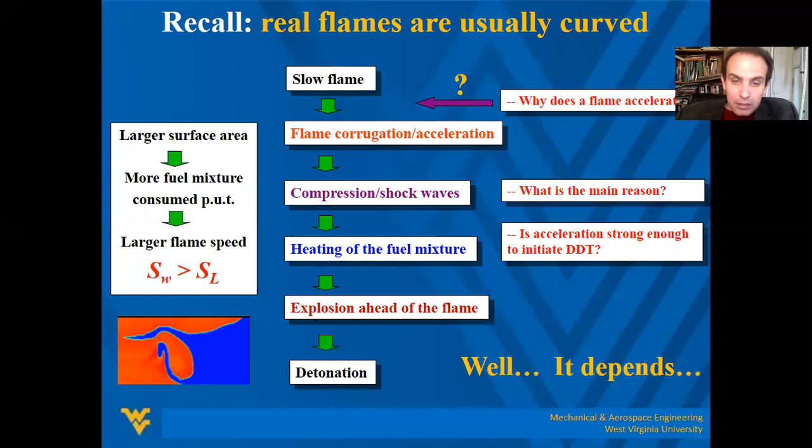But remember, we arrived at the point of how flame gets corrugated. And here you should realize two things. For decades, for most of the time, people assumed that flames are usually turbulent, and that flame is corrugated due to turbulence. That was a very difficult point because people say, okay, so flame is corrugated because of turbulence. Then I can say, okay, so to know how the flame corrugates, to know how the flame propagates, I should know turbulence, right?

If a mouse is scared of a cat, he or she should investigate what the cat is, right? Otherwise there's no way to survive. So we should investigate turbulence. And since we did not know what turbulence is, we did not know how flame propagates.

But here, luckily, the situation is not so difficult. There are many situations, and we will consider several of these in our class in April, in the lecture that's left. Very often turbulence is not so crucially important. It can be weak, it can be supplementary. And then we are lucky, then we are able to solve the problem.

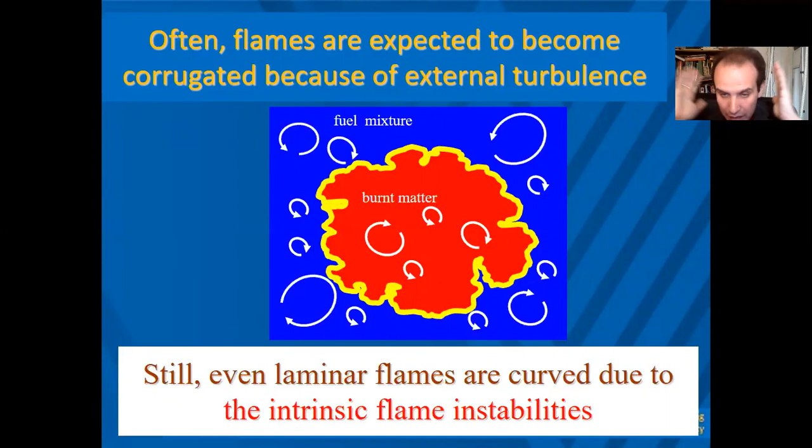Remember, in fact, even laminar flames are corrugated, and they can be corrugated due to combustion instability. So remember this picture, and I showed you also a picture of a flame front in the previous lecture which is corrugated but laminar. So even a laminar flame may be corrugated. Here there is no turbulence, that's vorticity. But in reality, even here, when I have a laminar flame, I provide vorticity. So turbulence may exist.

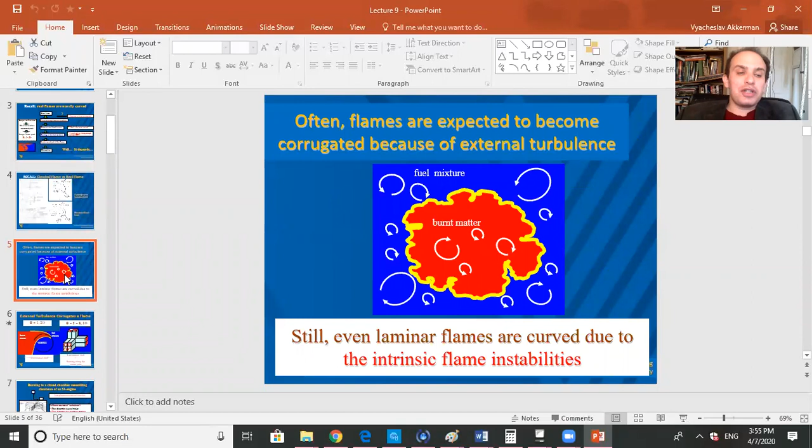So let's discuss what turbulence is and what we can deal with regarding turbulence. To answer this question, I should say that there are several approaches to how you can consider turbulence and what you can investigate. So let me start with this.

I make a pause for a minute so everyone wakes up and is ready to listen.

Okay, so in fact, I will tell you something. Remember I told you what is our key parameter for flame propagation? It's thermal expansion, theta, right? It's the density drop at the front. Here it is. And typically it's quite large.

But if you take my turbulence class, you may remember that basic turbulence theory says that density is constant. So basic turbulence theory is not ready to consider reacting flows. Basic turbulence theory assumes that the density of fuel and burnt matter are the same, so density is constant - you talk about an incompressible substance. And I should tell you that for a long time, all theories of flame propagation - theories, not simulations, not experiments, but theoretical approaches - were limited to the case when theta is equal to 1.

That is, when the fuel and burnt matter have the same density. Moreover, most theories employed two-dimensional geometry. You may say it's ridiculous, it's stupid. Well, people had nothing better, and they still were able to provide something to describe flame propagation. So let me follow this.

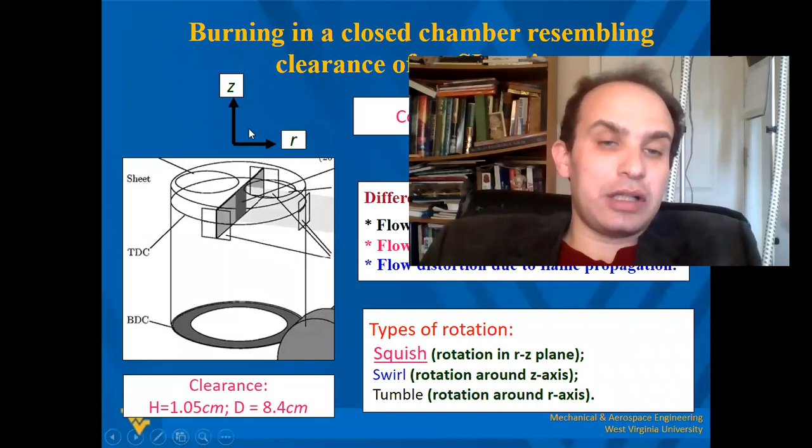Assume I have a flow and I have a vortex which rotates. If I rotate it, like on the next screen - what does rotation mean? Rotation provides you centrifugal acceleration. Do you remember centrifugal force, centrifugal acceleration? Imagine you have a circus and there is a biker who drives very fast. This biker can go along the wall. Why? Because there is a centrifugal force which protects him or her from falling down.

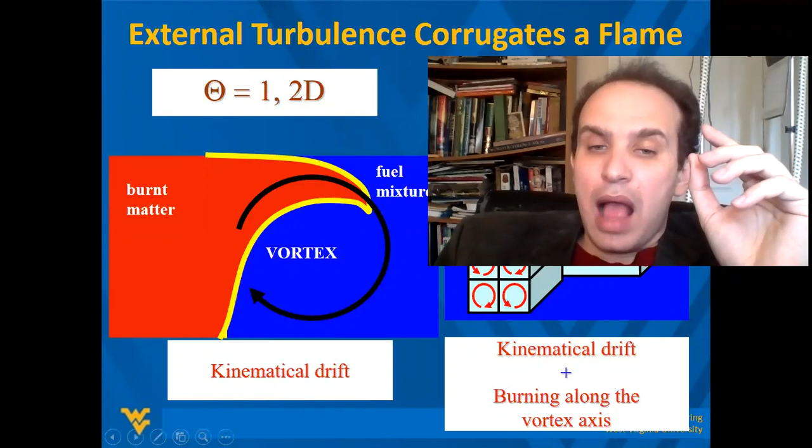The same story here - instead of a biker, now I have a flow. Imagine I rotate it, I have flame propagation along the vortex axis. So what does my vortex do? My vortex pushes heavy fuel outward and light burnt matter inward. So it will cause extra flame elongation, and this effect is very important - it's really related to thermal expansion. Since this effect is really related to thermal expansion, it's extremely important.

Because what do you see on the left-hand side? On the left-hand side, I tell you the classical approach - then theta is equal to 1, in a two-dimensional picture, when people accounted for kinematic drift.

Now we know two things: that in fact, kinematic drift - I will show it later - is weaker than expected because of thermal expansion. And you have a dynamic effect - burning along the vortex axis, which is a dynamical drift, centrifugal force. And this may very often dominate over kinematic drift. I will repeat it when it comes to formulas, but please remember this - that's conceptual.

So what do we know about turbulence when we consider some applications? Let's say I consider a classical engine, a car engine, as an example. There are many devices we can talk about - bottom dead center, top dead center, and piston motion. So what does turbulence do here, and what should I know?

First, you should know that in combustion we deal with complicated chemical kinetics, so I should know how turbulence interacts with chemical kinetics. Second, what are the sources of turbulence if we talk about an engine - but it's the same in turbines or whatever. First of all, it's injection, intake. So when I put fuel, I inject fuel in my burner, I generate turbulence.

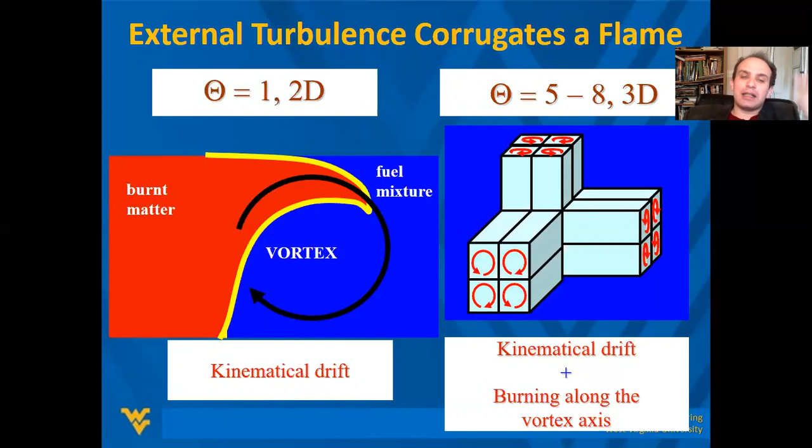Okay, so what I want to say - very good point, please go ahead. So the flame propagates due to vortices in all directions besides stretching, right? Yes, exactly, so it is, okay. Exactly, besides stretching, that's a very good point - besides kinematical drift, which you call stretching. That's a very good point. Yes, so flame propagates, besides stretching, flame propagates in all other directions.

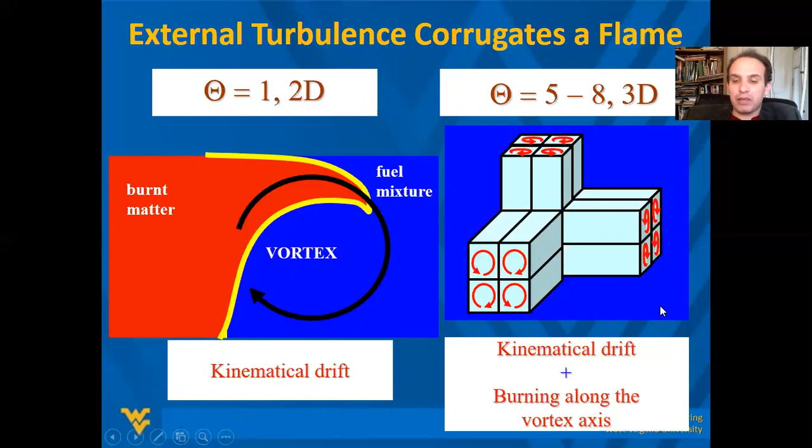Or let's say flame propagates in one direction, but there are vortices in all directions. But if I'm on the left-hand side, I would not feel my flame interacting with anything except stretching. Because there would be no difference between fuel and burnt matter - fluid mechanics knows only density. As long as I'm on the left-hand side, the density of burnt matter and fuel mixture is the same, so any rotations would not provide any centrifugal force. But what we see here is that there is centrifugal force, and it may dominate.

That's a very good point, and we will talk about this in terms of formulas. Very good point. Now...

So what we'll do next is really important and a really nice picture, so please pay attention to this. We'll be talking about the so-called regime diagram. Sometimes people call it the Borghi diagram, sometimes people call it the Peters diagram. There are different ways this diagram is presented in the literature, but it's something really important.

So far I told you that there are different types of turbulence, how it behaves depending on geometry of the source and so on. Now I would tell you that there are different regimes of flame propagation - it means turbulence may influence flame in different ways. Here I would like to show you how it happens, how flame propagates and how these regimes work, what they are, and how flame interacts with turbulence.

So please, this slide, next slide - okay, this slide, next slide, and a little bit, and this slide - that's what we have. This is something, guys, that I want you to remember. Please pay attention. So what are we talking about?

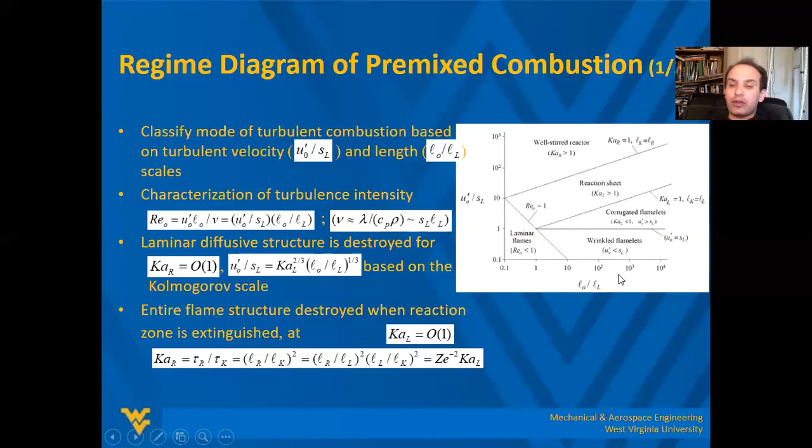Here's the same diagram, and here's this picture, and this is how it looks. You may realize if your integral scale is less than the flame scale, and if your U prime root mean square velocity is less than flame velocity, then we may say that flame is laminar. There will be no turbulence here. Your turbulent Reynolds number is less than 1.

You know that Reynolds number is characteristic of turbulence, right? It should be really big to have turbulence, so there is no turbulence here, but turbulence there is otherwise. Please look at these diagrams, and here we will try to understand together what's going on, where we are, and how things go. Please try to understand it.

So what happens here? This axis is L0 over LL, the ratio of the integral scale and flame. If I proceed in this direction, it means my vortices get larger and larger as compared to flame front, compared to flame thickness. If I proceed here, my turbulence becomes more and more intense as compared to flame propagation. Let's see what happens.

So what we have here, if you see my pointer, you may see here is a wrinkled flame regime. Again, all these lines are by order of magnitude, so it does not mean that here something happens, but if I increase velocity 10%, something else happens. It's a characteristic difference between the regimes.

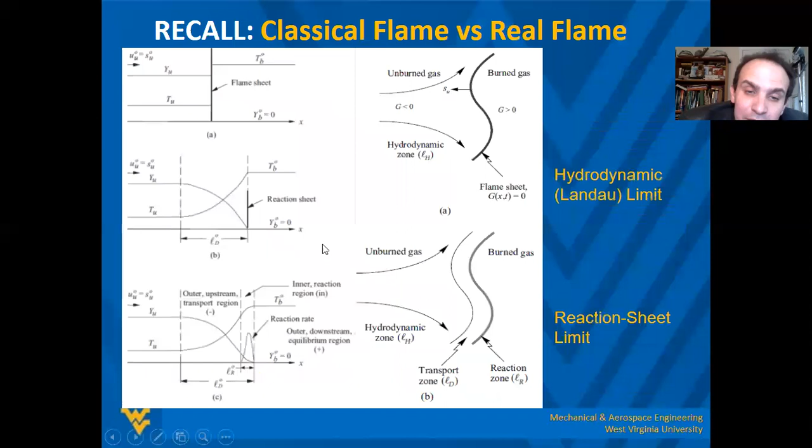So if I look at this picture now, what happens? Still, even the smallest vortex here is larger than the reaction zone. So it means turbulence does not penetrate chemistry here. Chemistry itself, turbulence itself - you don't need to know chemistry to describe turbulence, you just describe turbulence coupling to internal flame structure. That's what we call the reaction sheet regime.

It goes between two inclined lines. One line corresponds to when Kolmogorov scale equals flame thickness, when vortices just start penetrating it. And the second line is when Kolmogorov scale equals the active reaction zone thickness. So this is a regime when vortices penetrate thermal flame thickness but don't penetrate the reaction zone.

So if I want to describe this flame in picture C, what should I know? It will be more complex than corrugated flames because I have two features here: flame interaction with turbulence on small scale, so flame modification based on turbulence, and flame corrugation on large scale like before. Does it make sense?

Now let me go counterclockwise more. What happens if turbulence becomes very, very strong? At some point my small vortices will penetrate the active reaction zone, and that's when turbulence coupling to chemistry will happen. In that case I will not have a flame itself anymore because the front will be corrupted and destroyed. That's what we call well-stirred reactors.

Wrinkled flamelet or laminar flamelets - what do we have here? This is picture A on the screen. So what happened here? The flame is corrugated but laminar, because turbulence exists but turbulence does not, in fact, impact the flame. Does it make sense?

What else? If I go counterclockwise - corrugated flamelets, that's the regime typically people investigate, the most popular analytical regime. It goes between the line when U prime equals SL and the line when Kolmogorov scale equals flame thickness. Here is picture B. So the flame is corrugated, not enormously but conceptually corrugated by turbulence. But all vortices are still larger than the flame thickness, so the internal flame structure remains laminar.

So if I zoom into this picture and consider my flame front, still my vortex size is larger than LF, than the flame thickness, so the internal flame structure remains laminar. If I zoom this picture, each picture will show planar flame structure like it should be. So here I can employ geometrical consideration and say that flame propagation, flame dynamics, flame velocity will be proportional to the flame surface area - that's what we call stretching or kinematic drift. Flame corrugates this front. If I keep going counterclockwise, what happens here?

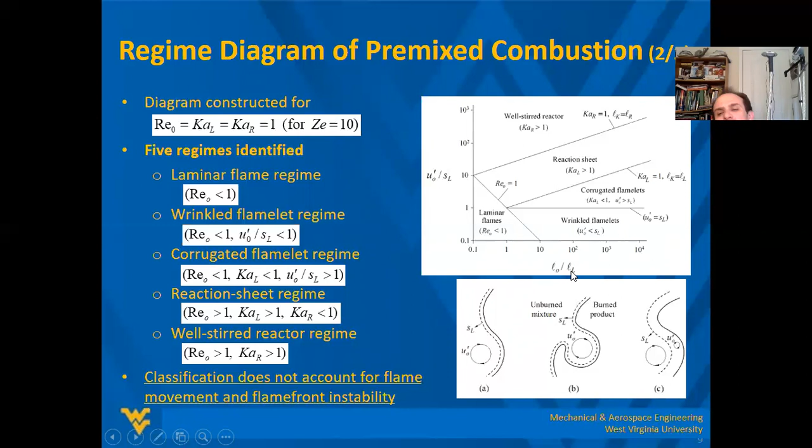But the key point is, even as it becomes wider, it becomes proportional to what we before called LF. And that's why actually we don't use LF here, we use LL, because it may be influenced by turbulence here as well. Okay, more questions, please.

So please, I do want you to remember this diagram. I know it's not a turbulence class, but this is something I want you to understand and remember because that's important. Now, when I plot this diagram, you may say, okay, but where is chapter 7 and chapter 8 in this diagram? Where is instability in this diagram? So how, if you talk about instability, where is it?

And here I should tell you something: remember when we talk about instability, we realize that even laminar flame can be stable, I mean even laminar flame can be corrugated, stable but corrugated. Now, if instability develops, what do you think? How does instability interact with turbulence? We know that turbulence promotes instability, but how does instability interact with turbulence? Will it be like a cumulative effect, or can they suppress each other? What do you think?

I will show you something, and this is a tricky question. I didn't know the answer until I started cooperating with Swetaprovo Chaudhuri, who is now faculty in Toronto. We interacted many years ago, and that was his idea, how to interpret turbulence with instability. I didn't know, but then I provided him with some insight and we developed something together.

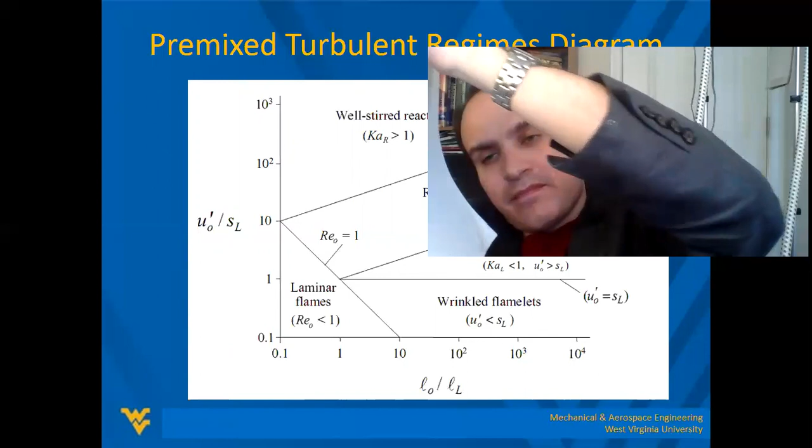So let's forget about everything I talked here, and let's say I have a flame. Assume this is a piece of paper, and assume this is a flame front. Assume it's propagated like a planar front, okay?

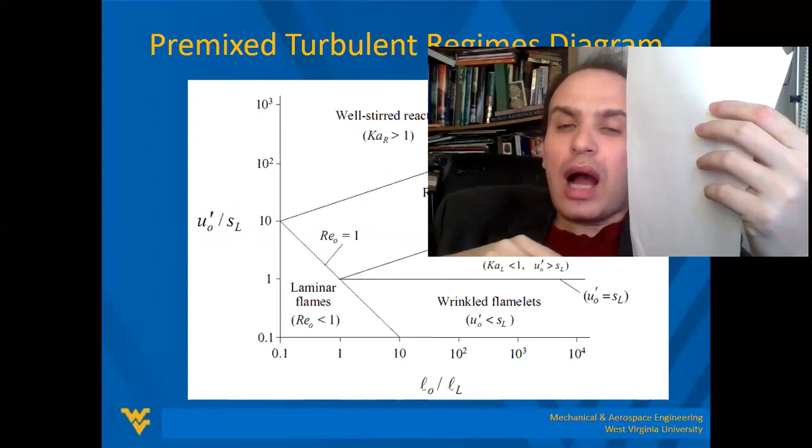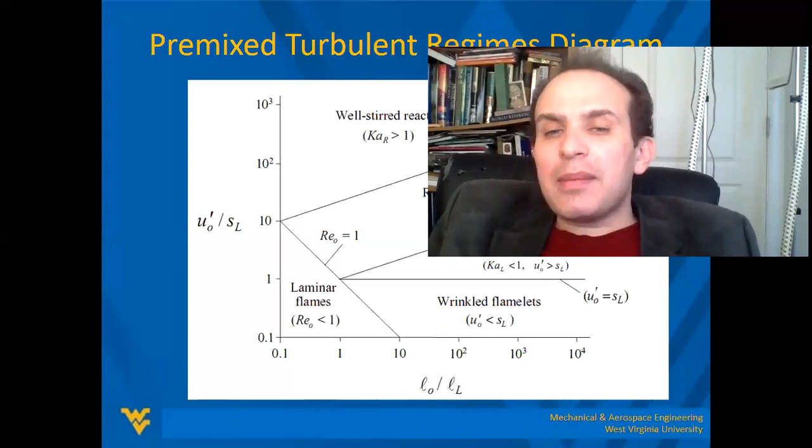Assume you have a laminar environment, but you have intrinsic flame instability like the Darrieus-Landau instability. How will this instability develop? At some point corrugation will start, so your flame gets corrugated and propagates corrugated. What does that mean? That instability needs some time to develop - it doesn't happen in a second. It needs some evolution time, it needs steady or self-sustained flame propagation to get developed.

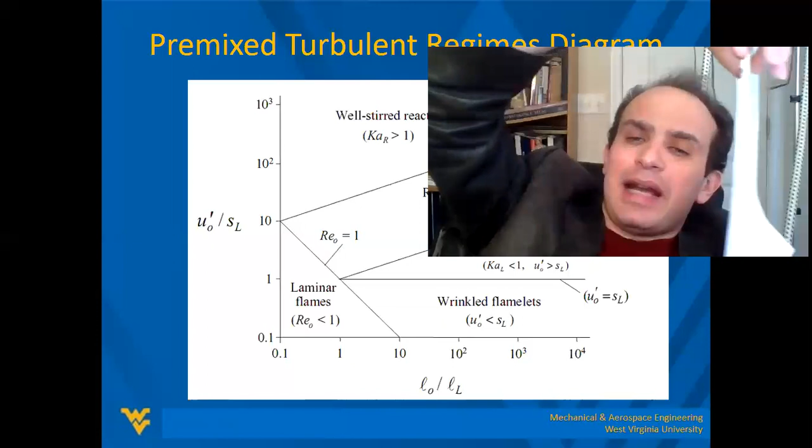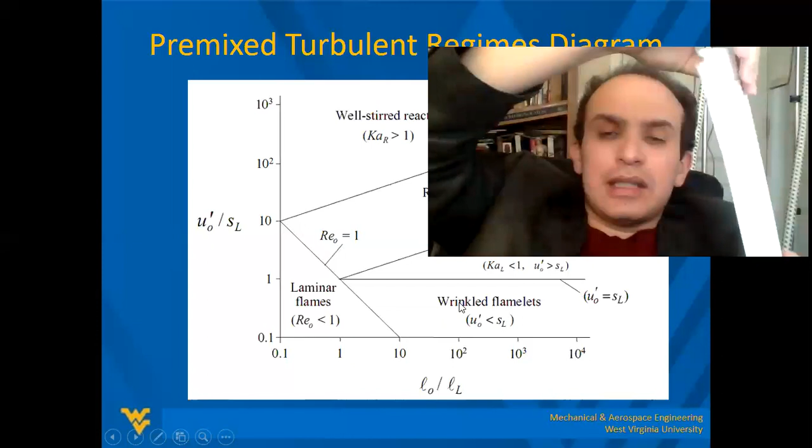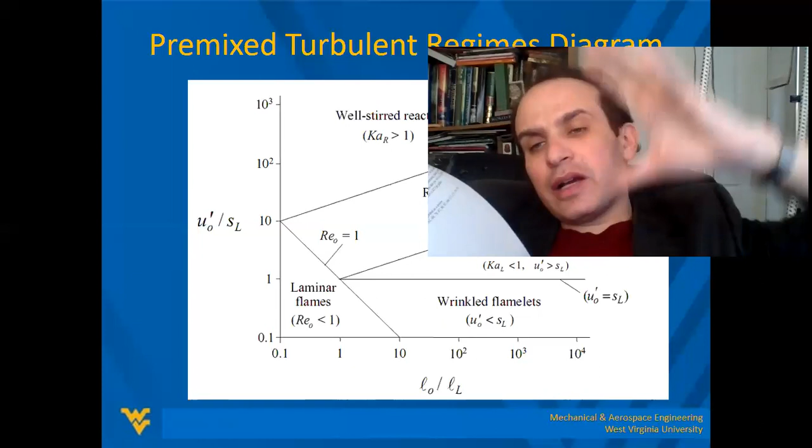What happens if I have some kind of weak turbulent flow? It will be some kind of shaking, but instability is still developing. And remember, the larger the size of the flame, the better it will develop, because it depends on the Rayleigh-Taylor cutoff. If my flame is less than the Rayleigh-Taylor cutoff wavelength, it will stay planar. If I go beyond this limit, if I have many Rayleigh-Taylor cutoff scales, then instability will develop, and the larger the flame, the better it develops.

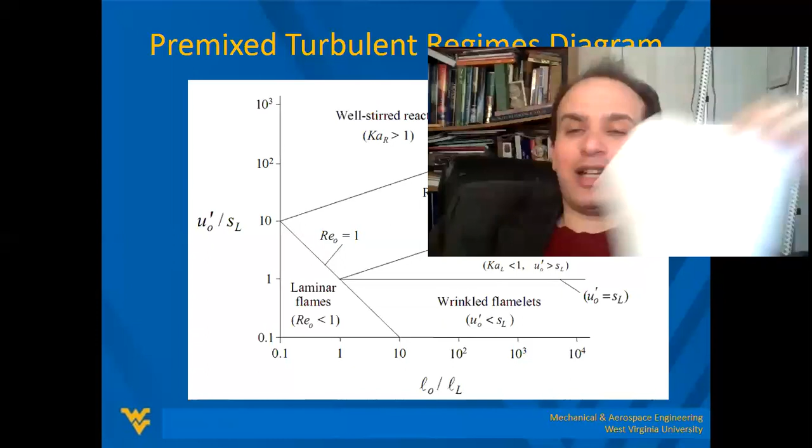Now assume I have vortices, I have turbulent flow - what will happen here? I want the flame to corrugate, but I have very strong turbulent flow. Imagine I have a very shaken flow. Can you travel in a storm?

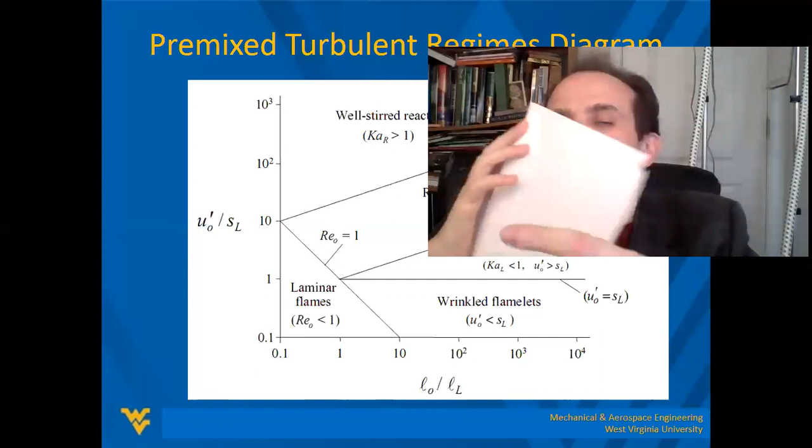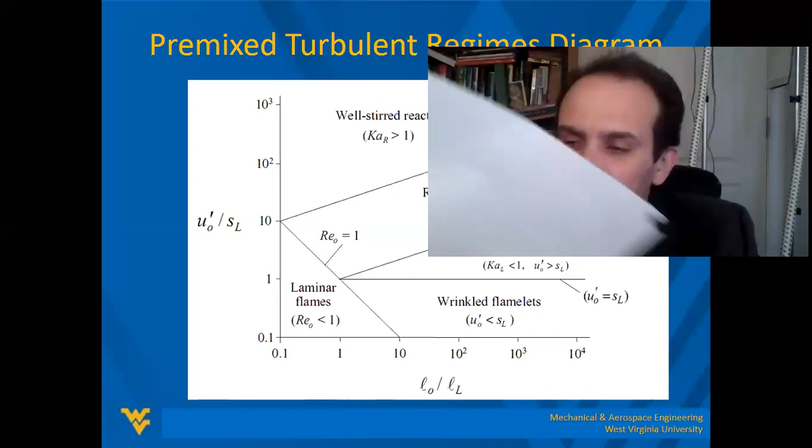That's the question, that's the point. Assume you are traveling, you take something like a yacht or some kind of boat, and you want to travel. If you have some kind of wind, this wind will help you go, right? But when you have a storm, it will crash your vehicle, your ship, and you will not travel anymore. So if I have strong turbulence, this turbulence will not let your instability develop - it will shake you out. That's the point, so that we should account for this.

Based on this, we arrive at a concept of turbulence-induced regime diagram. We want to incorporate the Rayleigh-Taylor instability in this diagram. It's exactly the same diagram as before, but now instead of U prime, I write U RMS, and here I have integral length.

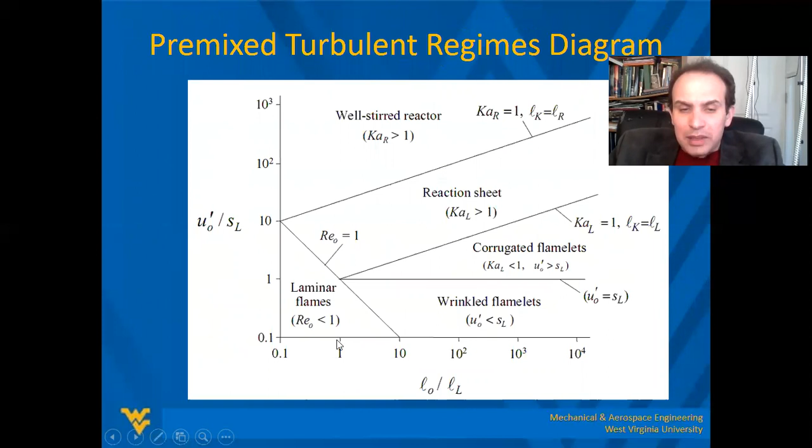So what do we know about instability? Here again I have the classical line like before. What does it mean to be at this axis? It means there is no turbulence, so it's a laminar regime. For laminar regime, you know that at some point you will have the Rayleigh-Taylor instability cutoff, which is about - let's say by order of magnitude, 20 to 100 times - larger than the flame thickness.

So do you agree that if I look at this axis, at point A - do you agree that point A is the point at which instability will start to develop? If I'm to the left of point A, my flame is planar, it cannot be corrugated, because the Rayleigh-Taylor instability is killed by thermal conduction. Remember chapter 7?

But what if I go beyond this point A? Here, instability should develop, correct? I know it's difficult - forget about turbulence for a moment. As long as your flame scale is less than the Rayleigh-Taylor cutoff wavelength, you have a planar flame. As soon as you exceed the Rayleigh-Taylor cutoff wavelength, you will have flame corrugation - instability develops. Remember?

So if turbulence is strong, it will not allow the flame to develop. So what does that mean, how do we describe it? Here I introduce a very nice concept, I'm proud of it: the so-called turbulence-induced Darrieus-Landau cutoff. This is shown by the solid line.

So what happens if I'm here, or here, or here, you see my pointer. Here turbulence is very, very weak, so it almost does not influence flame propagation. Flame is almost laminar, and of course instability will not be influenced by it. But if I increase turbulence, eventually I come to the point when instability cannot develop because of turbulence.

And here we shift the so-called Darrieus-Landau cutoff. You may see that if I'm here, what does it mean? I introduce the turbulence-induced Darrieus-Landau cutoff. What does it mean?

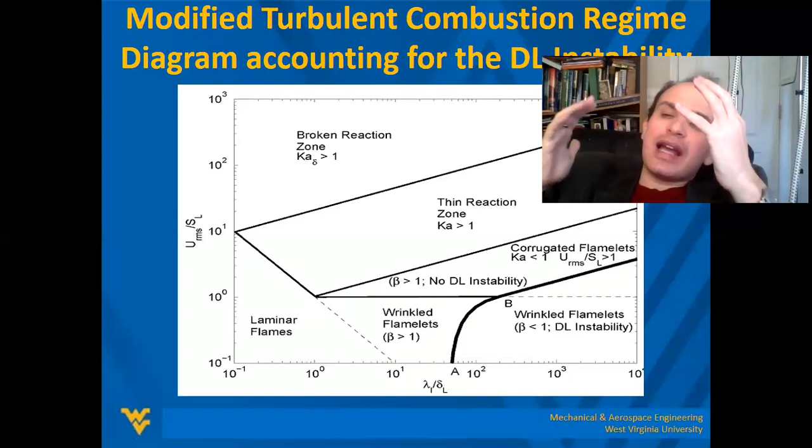It means that now I need to have corrugation on larger scales to make the flame stable, otherwise to make it unstable, otherwise flame will propagate. And in fact, if my turbulence is very, very strong, what does it mean? It will mean that instability will never develop, it will be just turbulent flow.

So what does it mean that instability will never develop? It will mean that my Darrieus-Landau cutoff scale tends to infinity. So my turbulence will penetrate the burning zone, and my transport coefficients will change, and my Darrieus-Landau cutoff will change. So if I talk about turbulence-induced internal flame structure, here I talk about turbulence-induced Darrieus-Landau cutoff scale. That's how it goes, it's a nice concept.

So basically, what is the difference between this diagram and this one? One more line. And here we may say that by order of magnitude, here we are, and at point B the corrugated regime flame starts and it's changing. So at this point, you may see here that below this solid, dark line, instability develops. Above it, instability would not develop because turbulence will not allow instability to develop.

Definitely there will be no instability here because there is no flame here. Here it might be, but it could not, because of turbulence. Turbulence killed it. And here we introduce the so-called number beta.

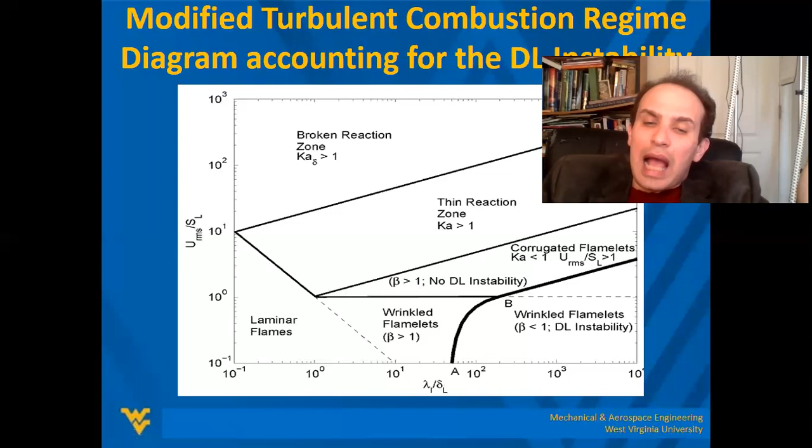We call it beta, the Bychkov number, named after Vitaly Bychkov who calculated this. Basically, number beta shows the relation between turbulent and laminar flow. If beta is larger than 1, it means turbulence killed the Darrieus-Landau instability. If beta is less than 1, it means instability still develops, but it is modified by turbulence, and here's how it goes.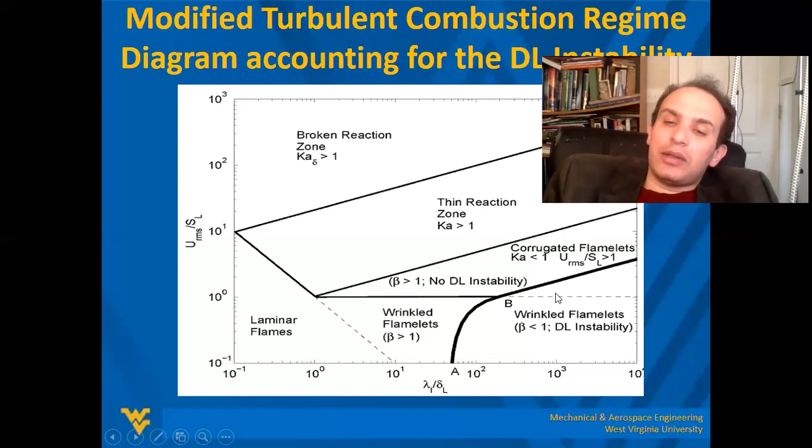Do you understand this? Does it make sense for you? So please remember this diagram, how it looks like.

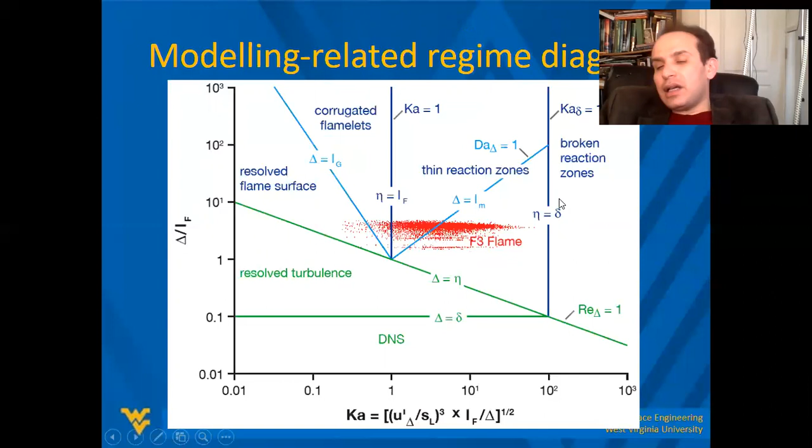And also, this diagram shows numerical calculation. This diagram here has different axes, but it shows numerical simulations. Because when you simulate turbulence, there are different ways to approach it: there is direct numerical simulation when you resolve all scales, and there are large eddy simulations where you simulate large scales but model small scales because of some kind of filter.

So to do that, what should you do? You should know how to select this filtering size. And definitely, when you talk about combustion, in addition to turbulent scales like Kolmogorov and integral scales, you should deal with the combustion scale. So basically, this diagram here is really a counterpart of the previous diagram.

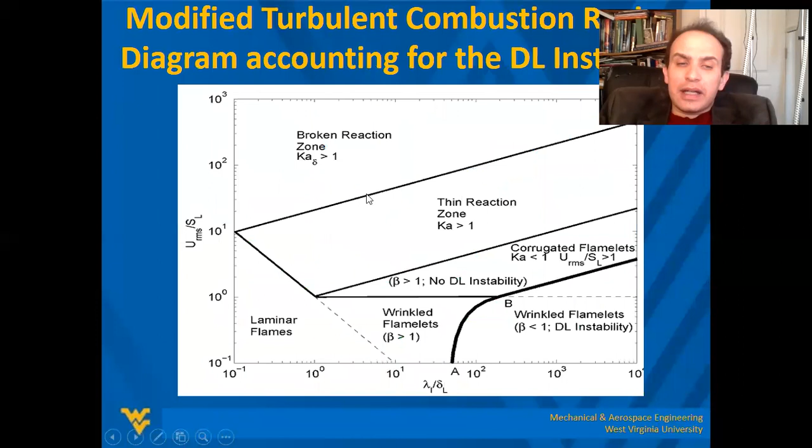What do we plot here? This axis shows delta, which is the filter size — this is the size of your grid, for instance. And LF is the flame thickness. And what you put here is your Karlovitz number, which is a measure of how turbulence develops.

So what happens, let's look at it. What happens here if you are downstairs in the small regime? Here we say delta is less than the flame thickness by order of magnitude, so delta here is actually less than the active reaction zone. What is it? It's DNS, direct numerical simulation.

It means that now your grid size is so small that it will resolve the Kolmogorov scale, and it will resolve the active reaction zone. It means you resolve everything. Here it is. Now the axis shows delta equals delta, meaning the grid size is equal to the active reaction zone.

Here delta equals eta means delta equals Kolmogorov scale. Now let me go clockwise. What I'm dealing with here is resolved turbulence. Why? Because my grid size is less than Kolmogorov scale, which means I resolve all turbulence. So it's like DNS. But why isn't it exactly DNS? Because my Kolmogorov scale here may be larger than the flame, so I don't resolve all of the flame anymore.

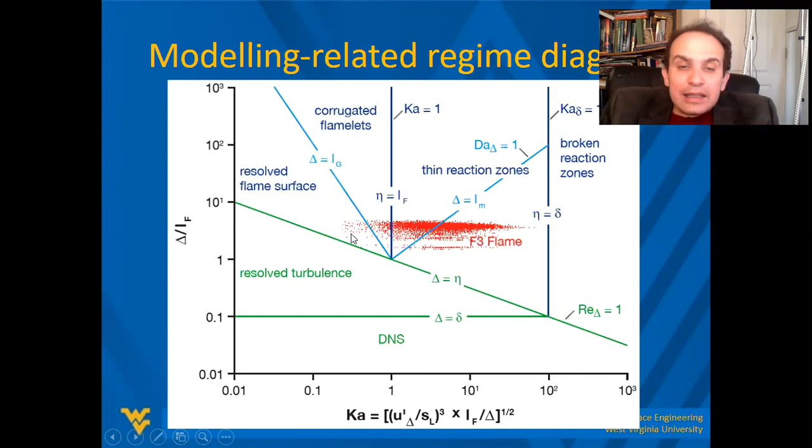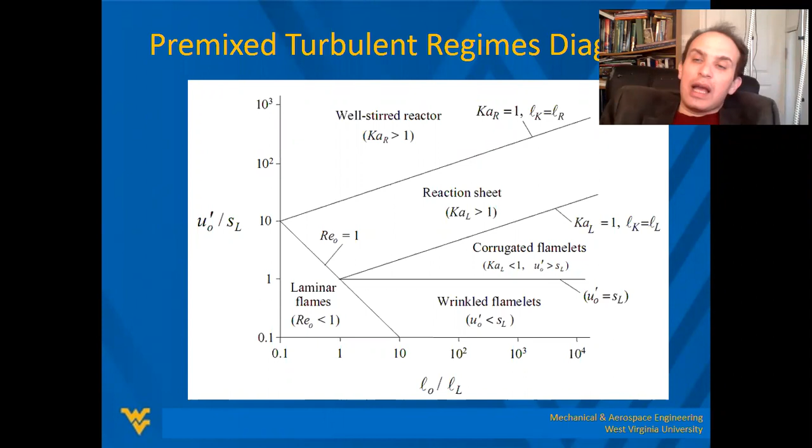It's good, so that's how the regime diagram looks like. What will we be doing next for these regimes? We will try to describe how flame propagates, and find flame velocity as a function of different parameters. When I calculate flame velocity, what do we want? The standard assumption is that we want to calculate turbulent flame velocity, what we call ST, and to find it we will scale it by laminar flame velocity, correct?

What is laminar flame velocity? You know it, it's an idealized parameter - even a planar flame doesn't exist in reality, it's an approximate value that we have. So do you agree that we better measure corrugated flame velocity by planar flame velocity? So we'll be looking for this ratio, provided that SL keeps information about chemistry, about internal flame structure. And we'll be looking for this value as a function of what?

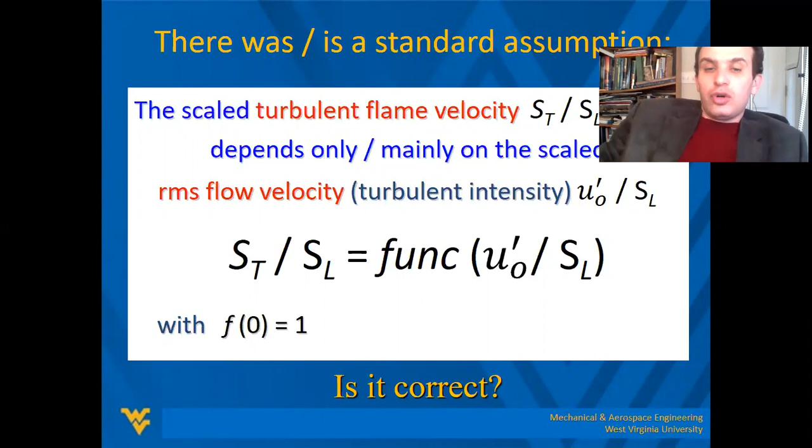As a function of turbulence. What does function of turbulence mean? It should depend on turbulent intensity. And when I talk about interaction with turbulent intensity, turbulent intensity should be scaled by some value appropriate for me, true? And what value is appropriate? It's laminar flame velocity. So we will try to look for this function, and then we will realize if it's a good approach or not. Maybe not too good, and that's what we'll start considering.